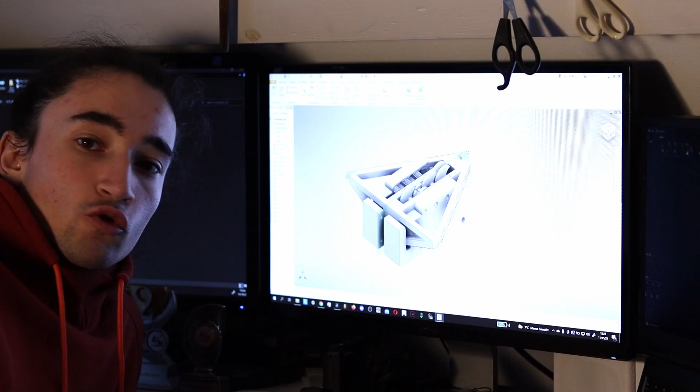What's up? I'm Thomas and I make stuff, and this is Making a Fully Automatic Crossbow, part 1. Now I know what you're saying, Thomas, you've already made a crossbow. Well, the thing is, that's not a fully automatic crossbow. I'm a lazy bitch, okay? So I made this thing in CAD and it's pretty fucking epic. This took me way too long to make.

They are holding me captive. I have to work for them. So please get me out of this place. It's very, very

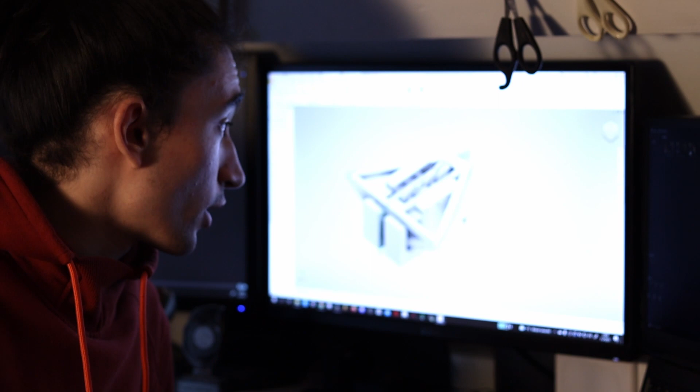bad. Never mind that. Yeah, so we're gonna have to 3D print this, and that's how 3D printing works. I've got a bunch of these hooks right here. They are going to be rotating, and as they are rotating, they're going to be pulling onto the rope, passing it onto each other and pulling it further along.

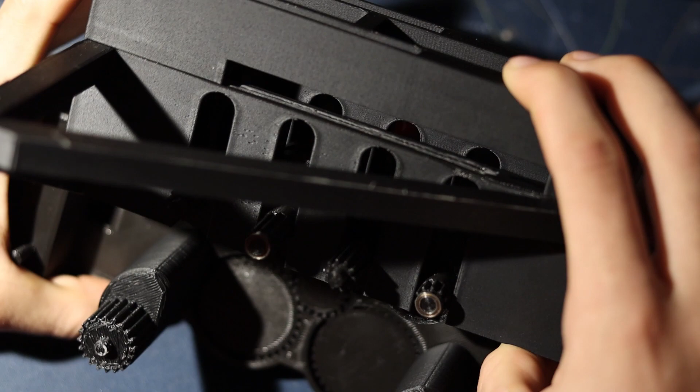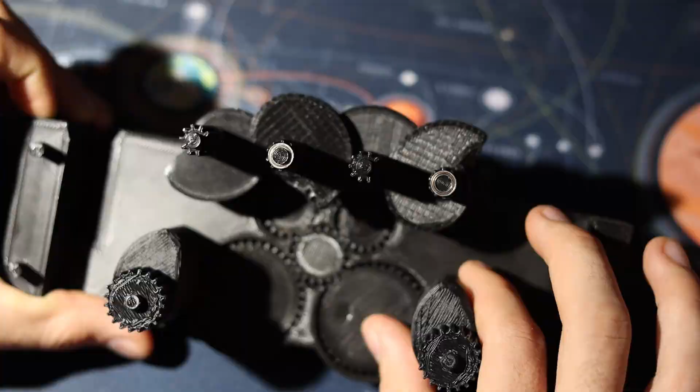Now when the rope reaches the end right here, these guys are going to be facing upwards, and as they are facing upwards, they will push this part up, right? This part is going to be pushed up. The rope's going to be in this slot right here, and it's going to pull the rope away from this hook, and then nothing will be holding the rope back anymore, which means the rope can just freely shoot forward, pulling an arrow with it as well.

As you can see, there is actually space for 2 different arrows, which means that our crossbow is going to be shooting 2 arrows at once, which is absolutely fantastic. Now these hooks, they can't pass on the rope to each other. That's why I've been continuously cutting away at them, and I've actually succeeded at making the first 3 ones pass on the rope to each other. It's just the last one that still needs to be done, and it's proven to be the most difficult one, but I'll be fine. I won't.